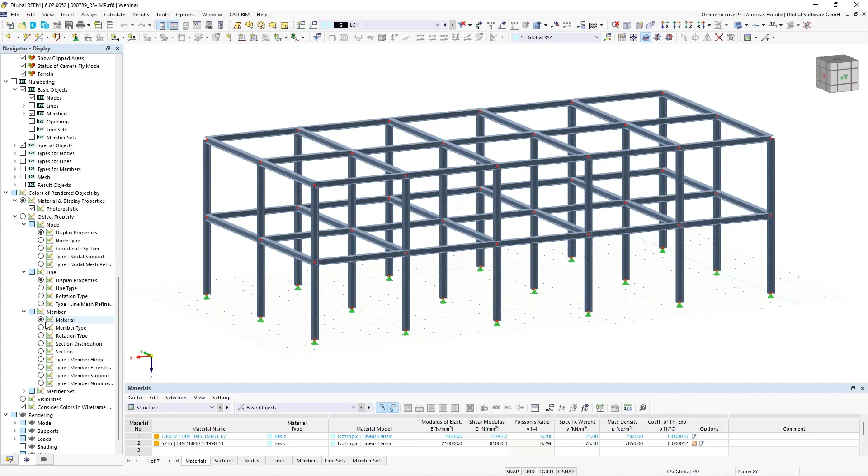I can show you the navigator display. You can use different settings here. For example, the members according to member type, section, and you can see there's the same color for all the same cross sections. I would like to show you two possibilities to show the columns and longitudinal beams and so on with different colors. At first, I start here left above with the base data.

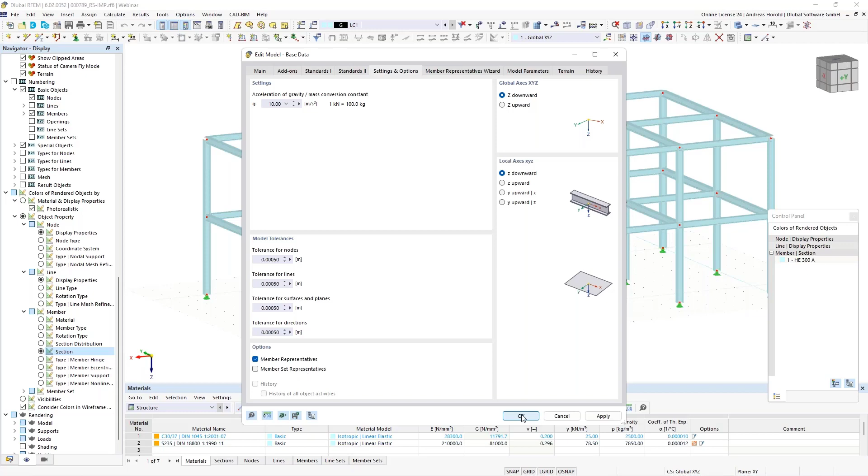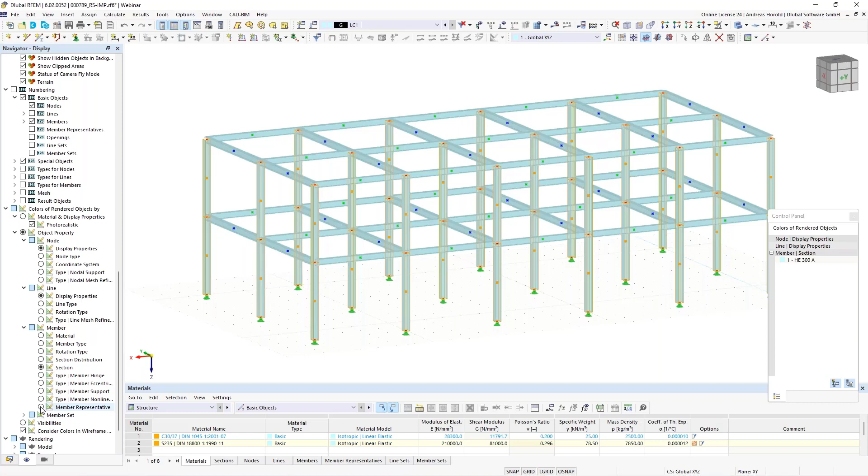And I go to settings and options and activate the member representatives. Okay. Now you can see the different member representatives. For instance, the cross beams and the longitudinal beams and the columns. And you can select them here in the navigator display on the left side, member representatives. And now there are the columns and so on with different colors. And it's also possible to rename them.

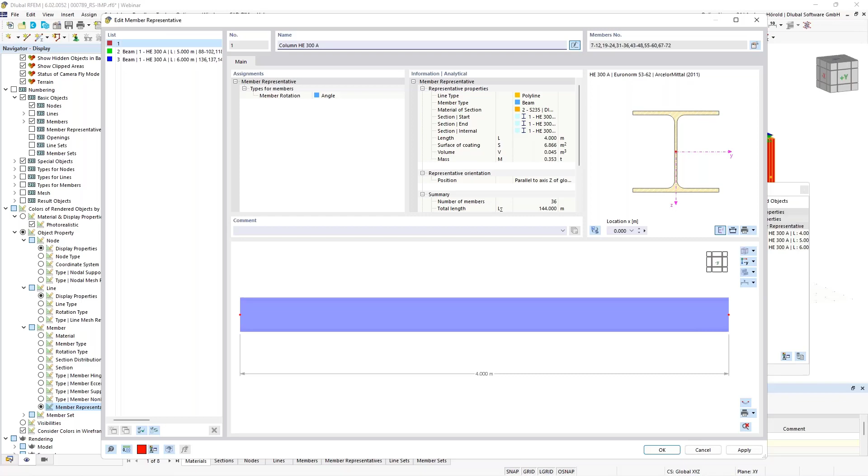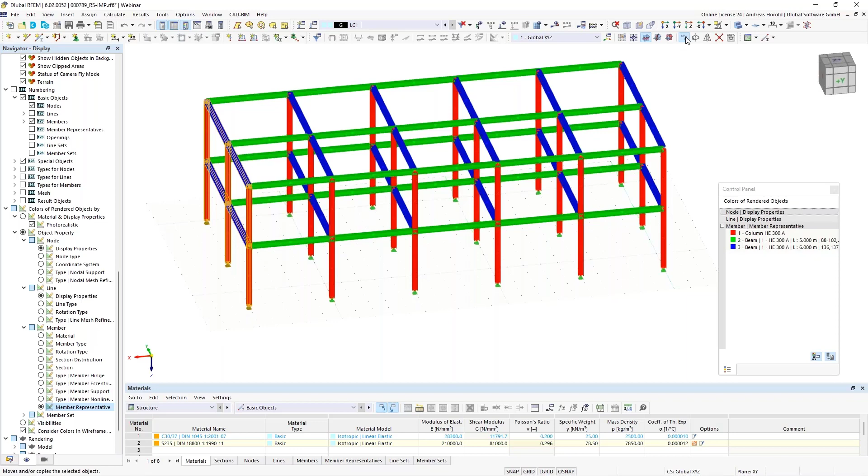If I click on such a member representative, I can edit here the name. For example, call it column HE300A. Okay, and I could do that for all. So that's one possibility, but the disadvantage is, it works now because all the members have different lengths. But for example, when I select those here and move them 1 meter in X direction, then you can see those members and those members have the same length. And that's why that option doesn't work anymore.

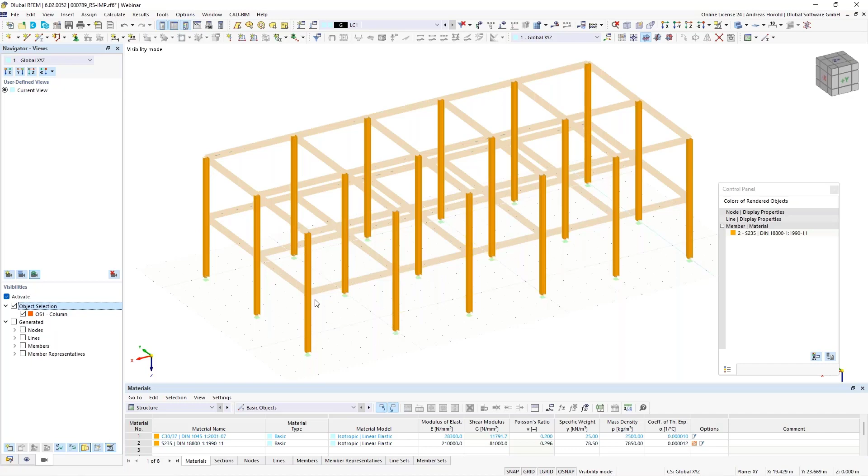Okay. I switch off the member representatives. I can also deselect it here, member representative, then the dots are also undisplayed. Okay, so next possibility, I create object selections. With a right click here in the navigator data, I select new object selection. First, I select the members that are parallel to a certain member. I select one member, okay. And I call it column. And how can I display it? So for example, that's the first selection. And you can see it also in the navigator views.

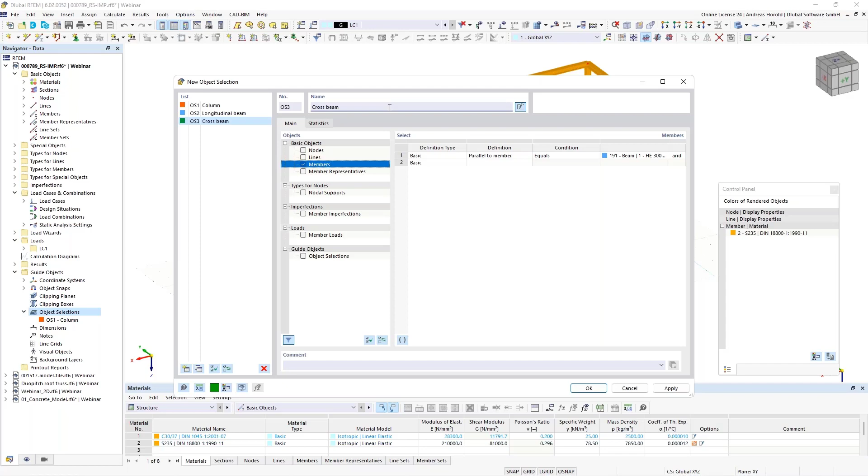So we continue with the next object selection. I have to activate all again. So new object selection, the same workflow, members that are parallel to this member, for example, and I call it longitudinal beam. Okay, next selection. Again, members that are parallel to this member. And I call it cross beam. Okay.

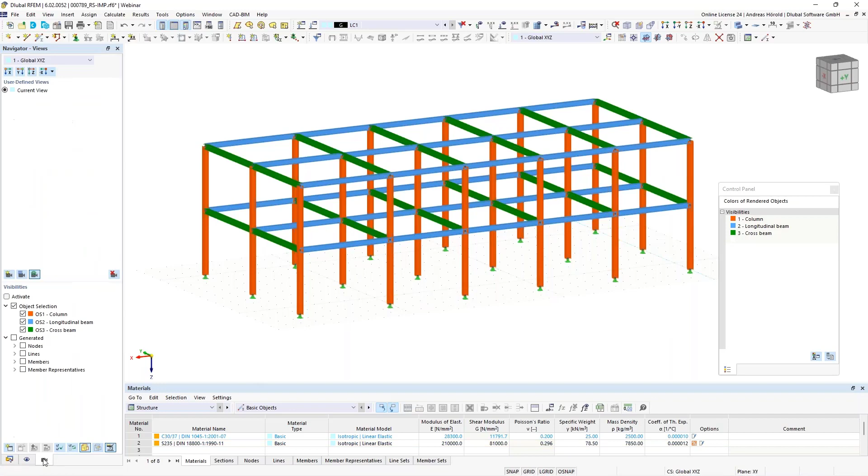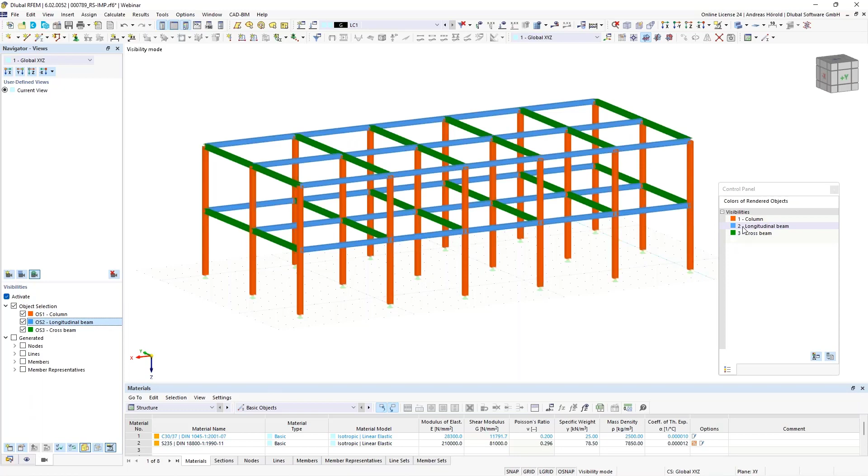And now you can switch to the navigator display. Scroll down and check here visibilities. And now there are all the members with the different colors. And the next advantage is you have got certain views. You can activate, for example, columns, longitudinal beams, cross beams, and so on. And you can also change the color if you want. For example, yellow. I think it's a nice solution. You have got the views in the navigator views and the colors in the rendering according to the visibilities. Okay, that's all to this question.

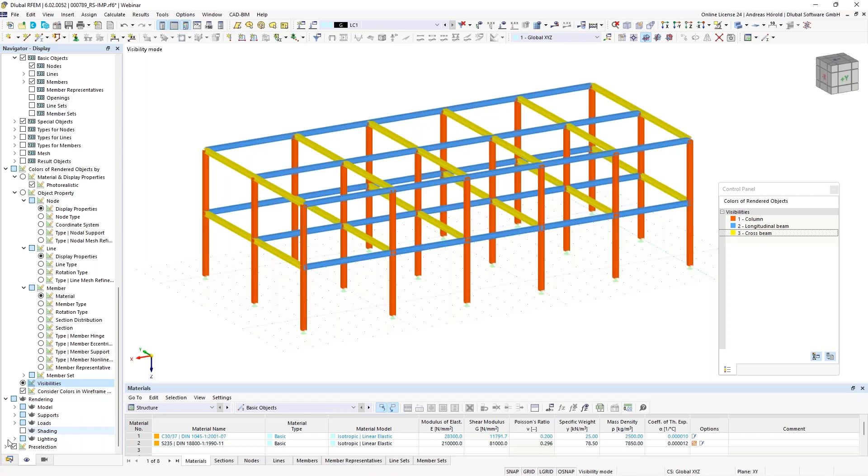We turn to the next model. Such a small steel hall, because the question is, where can I activate the lack of correlation in the load wizard of RSTAB 9 and RFEM 6? Now you can see this building with small height and so on. If the wind load for buildings or structures is to be determined by the simultaneous assumption of aerodynamic pressure and suction coefficients on the windward and leeward sides of the building, the correlation of the wind pressure on zones D and E of the wall surfaces may be taken into account.

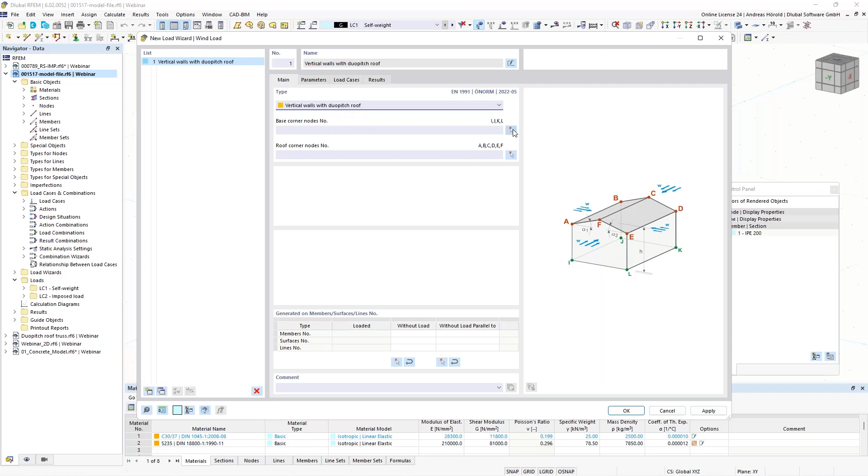I would like to show that on an example. I create a wind load. Here left above, insert, load wizards, wind load wizard. So now I open the dialog box. At first I select vertical walls with duopitch roof, and I have to select the base corner nodes. That's quite easy for that model. Okay. And the roof corner nodes.

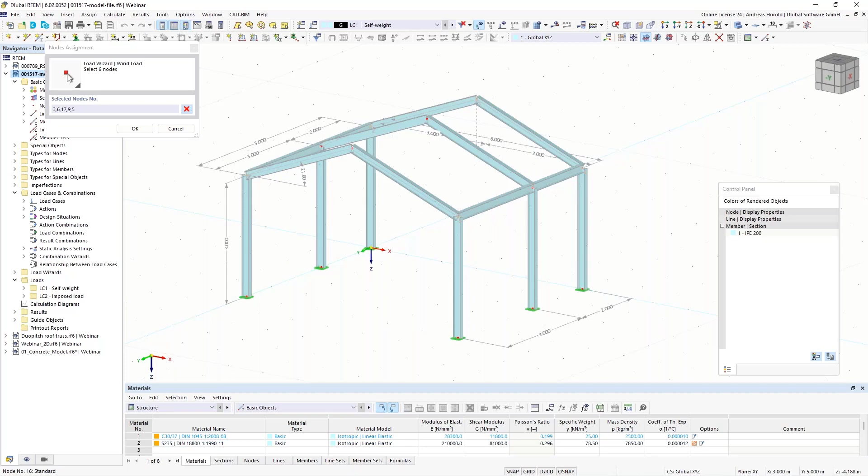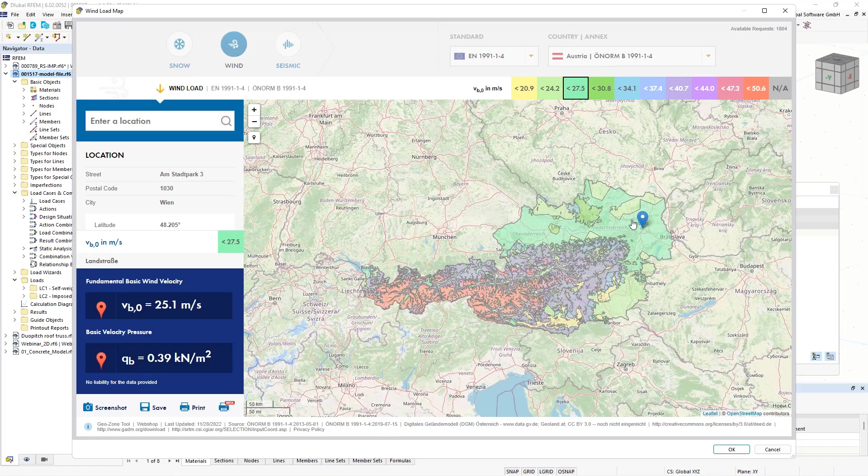Okay. So that's all. And then we turn to the parameters. I use the load maps and I import the location. I selected the Eurocode and the national annex of Austria. Yeah, Vienna is selected. I leave that for that example.

What is important to us is here at the bottom, the lack of correlation according to Eurocode. For buildings with an aspect ratio of height to width larger than 5, the resulting force is multiplied by 1. And for buildings with a ratio of height to width smaller than 1, the resulting force may be multiplied by 0.85. And intermediate values are linearly interpolated.

So I create a load case at first, and then let's turn to the results. And we take a look at the zone D and E. We remember the wind pressure and suction, 0.56 and 0.20. And if I go back to the parameters and I select the lack of correlation, then the loads should be decreased. Yeah, you can see it was 0.56 and it's now smaller, and also the minus wind pressure on zone E.

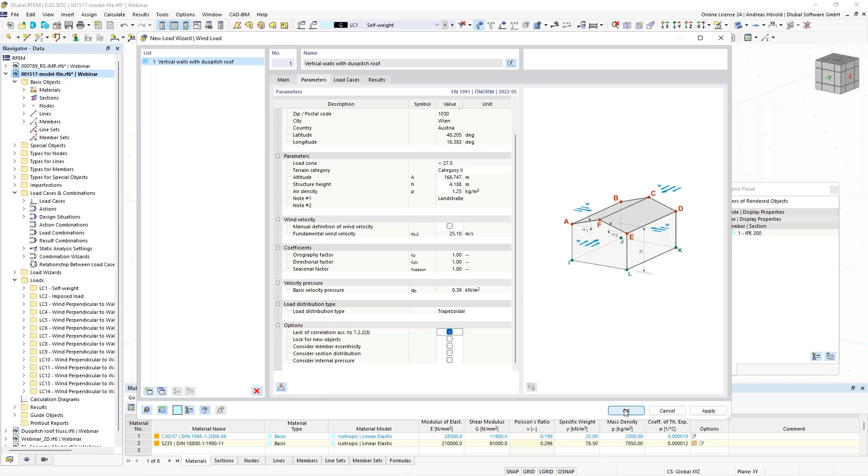Okay, then we turn to the next question. RFEM 6 crashes directly after the program start. What can be the reason? Recently, the graphics card was mostly to blame for crashes occurring after the program start or extremely slow program reaction. Yeah. I would like to show the website.

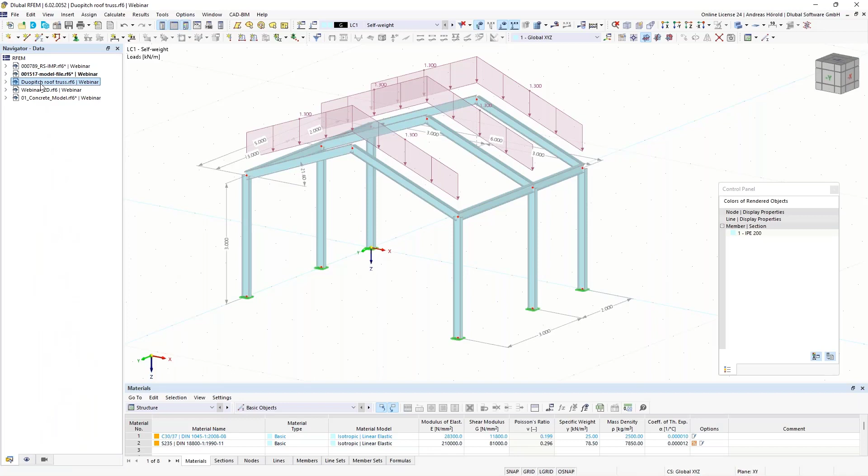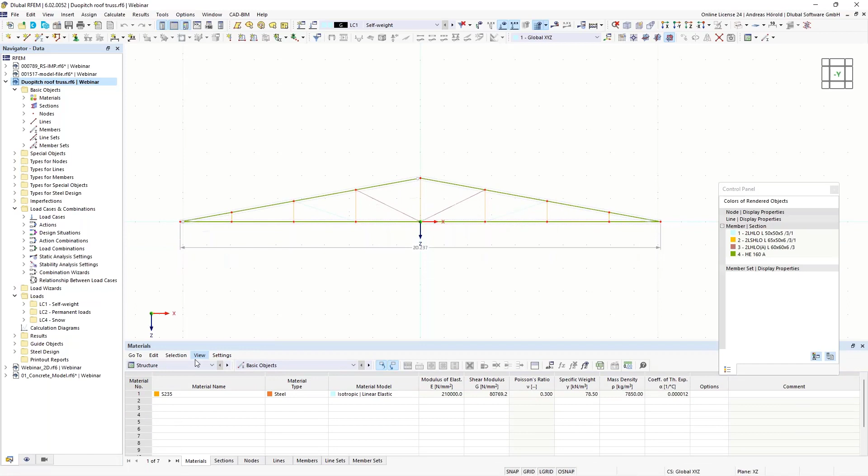We turn back to RFEM and to the next model. So the next question is, it is not possible to design double angles for my model using the steel design add-on. Every time I try it, the program shows information about the invalid section shape. Okay, let's do the steel design. Okay, so you can see the error message.

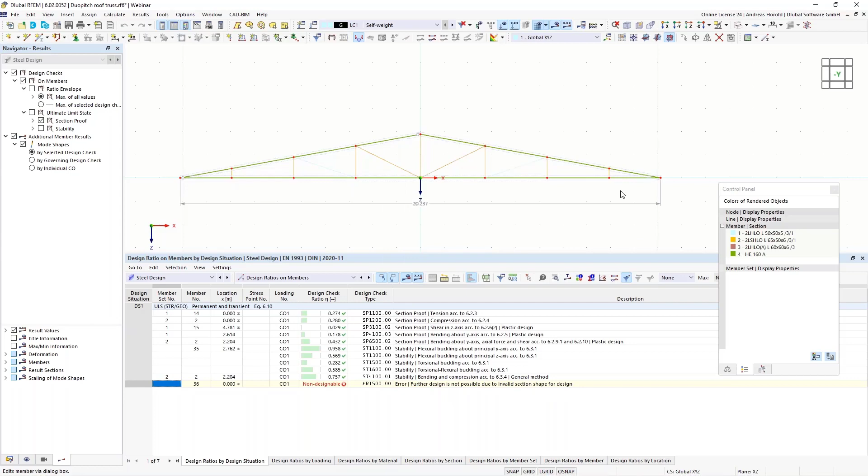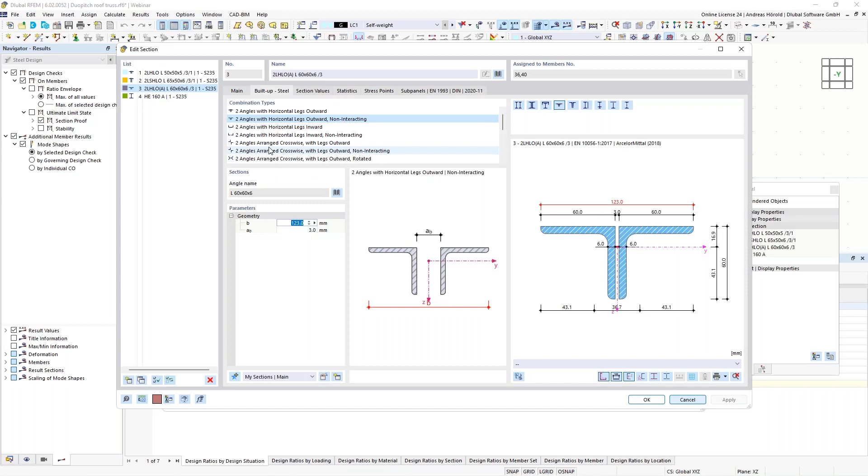So you can see that member is not designable because of the invalid section shape for the design. So I can select the two members, and then members, edit, and I can edit the section. It's a built-up steel section, and the design is not possible for the non-interacting combination type, that one. But cross-sections without this property can be designed by the add-on, for example, this one.

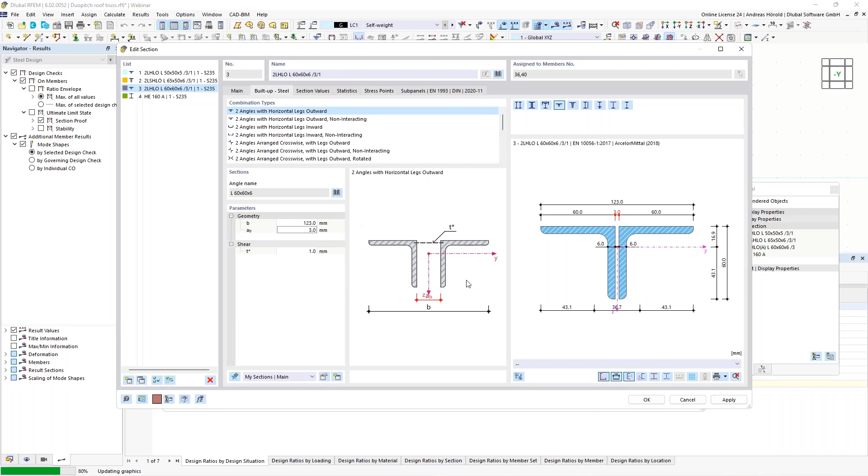And now you can see the shear. The interaction of members can be affected in RFEM by the T value. It's taken into account when calculating the shear areas and depends on the formation of the bracings. I leave one here. I select new section, L 60 by 60 by 6. Okay, 123. Okay, that's all. That should be sufficient. I start the steel design again. And now it should work.

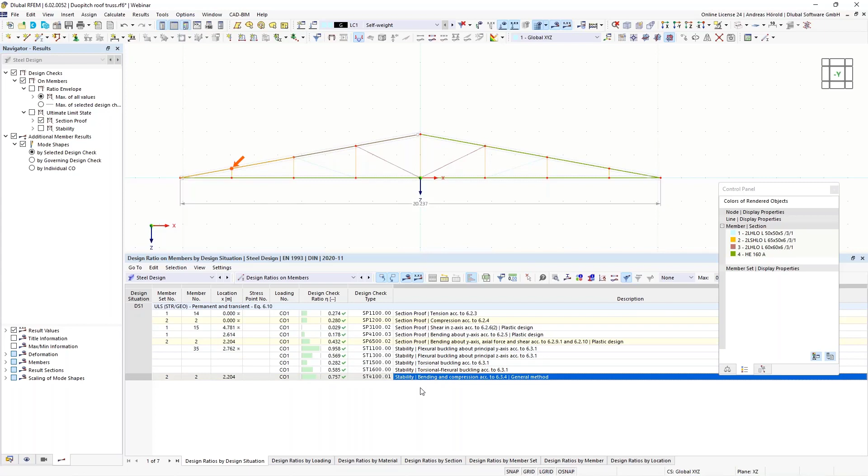Okay, now we can see the stability design. We don't get any error message, and that's why it works now, because of our changing of the cross section.

Okay, then we turn to the next model and the next question. Next question: is it possible to display the sum of forces on a line hinge for the dimensioning of fasteners later?

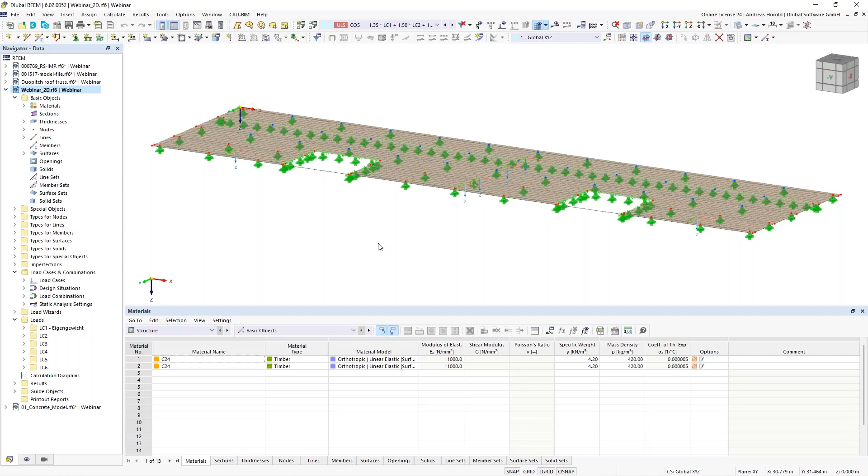Yes, that's possible. With regard to the dimensioning and choice of fasteners to be applied between the two surfaces, it's useful to know the resulting forces or moments between these surfaces. We have got a line hinge here, we can double click on it.

There's a very small spring around the x-axis, and a higher spring constant for the translation in x and y direction.

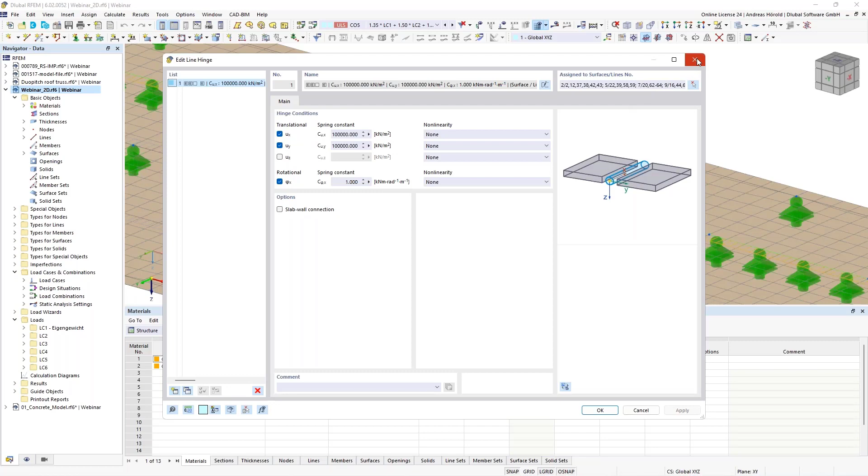So, if you want to see the results, we can do a right click and then turn to the result diagram. Then you have to scroll down, it's quite at the bottom. And then you see the releases here, line hinges, and the forces.

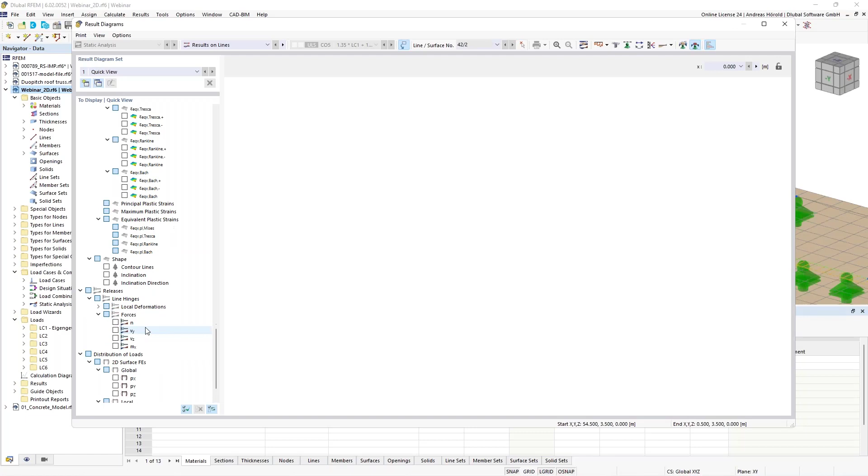What's interesting to us is vz, and then right above, with that button, you can edit smooth ranges of the result diagrams. Just click on it and you can enter certain areas, for example from 0 to 5, 5 to 10, and 10 to 15.

And if you take a look on the right side, for results, it's automatically selected that we want to display or smooth the releases and forces vz.

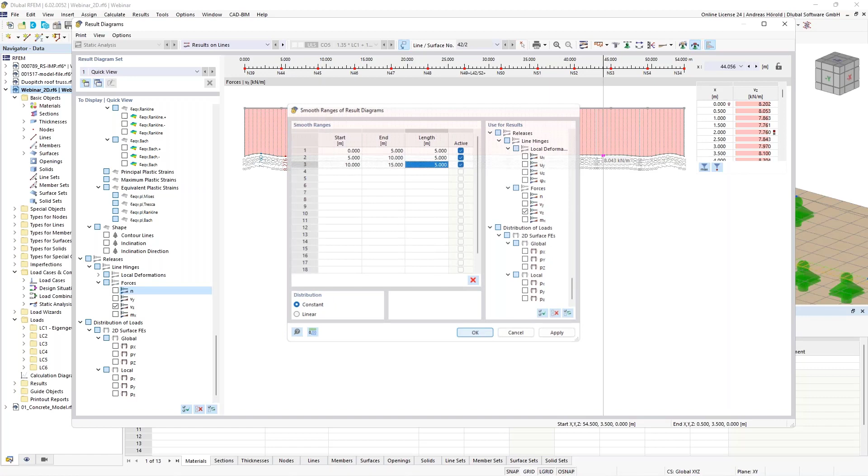Now you can see the sum of that area here, the 5 meters, about 40 kilonewton. That's quite similar for our fields or areas. And the average is about 8.1 kilonewton per meter, which would be the value for the dimensioning of your fastener.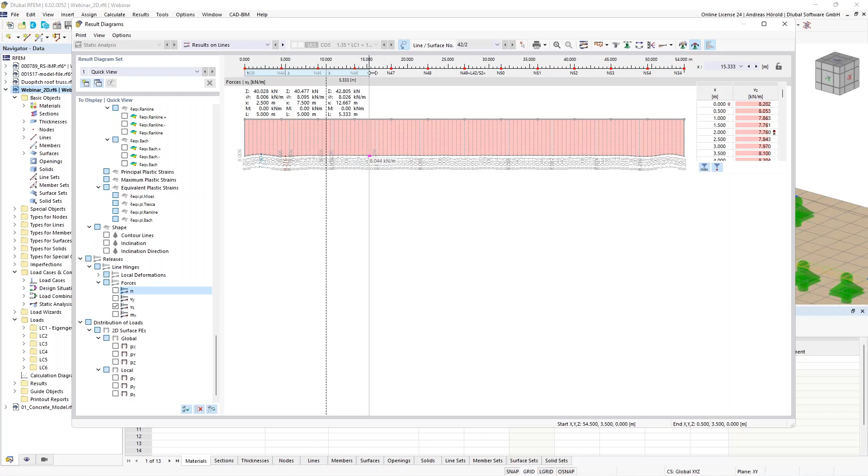You can also modify the area, extend it for example, and you can see the average is nearly the same over the length of the line hinge.

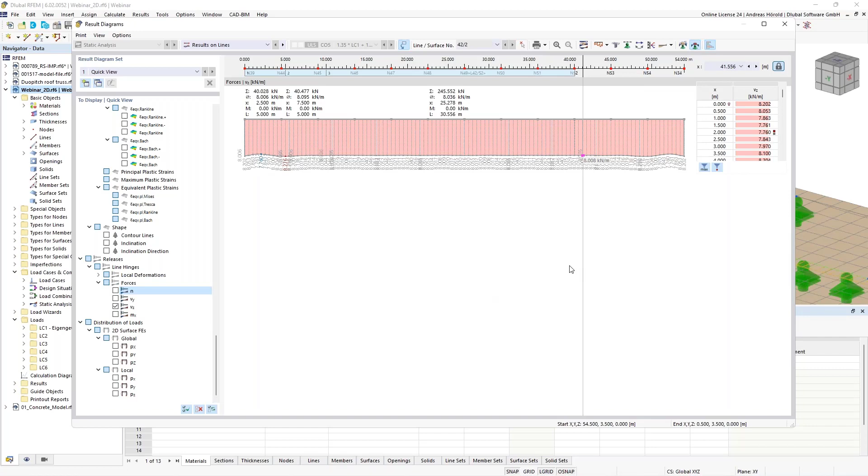It's also possible to print that directly to the printer, to the printout report, to a PDF, to the clipboard, or to a file, which would be a PNG or JPG file. That would be possible. Okay, that should be all to that question.

Then we turn to the last model and the last question. It's about concrete design. The question is: when modeling and calculating downstand beams made of reinforced concrete in RFEM 6, is it recommended to always create member sets?

I have to say yes, at least if there are 2 or more members that act as a continuous member, then I would say modeling with member sets is recommended. We did it in that example because this is the only way to consistently determine the reinforcement for the entire structure components. It's an advantage, especially for the calculation of the anchoring lengths.

Now we've got ribs here, and for ribs, the effective width is not determined along the complete member set. In that example, one member was defined for each span. For example, we can double click on it.

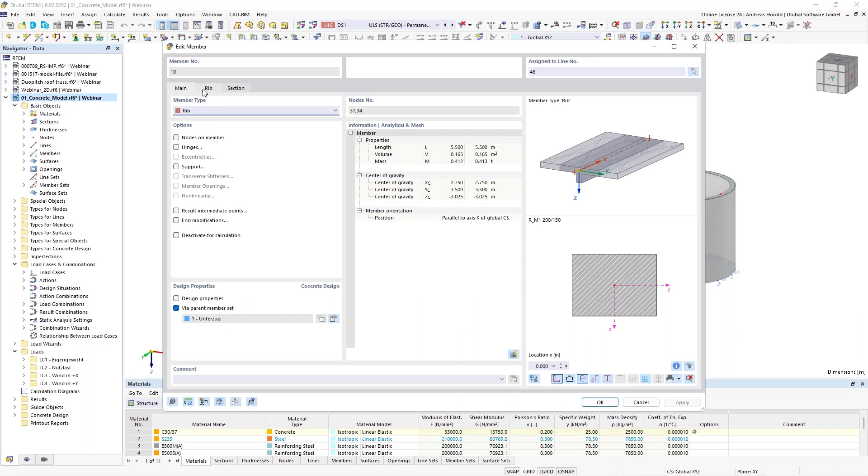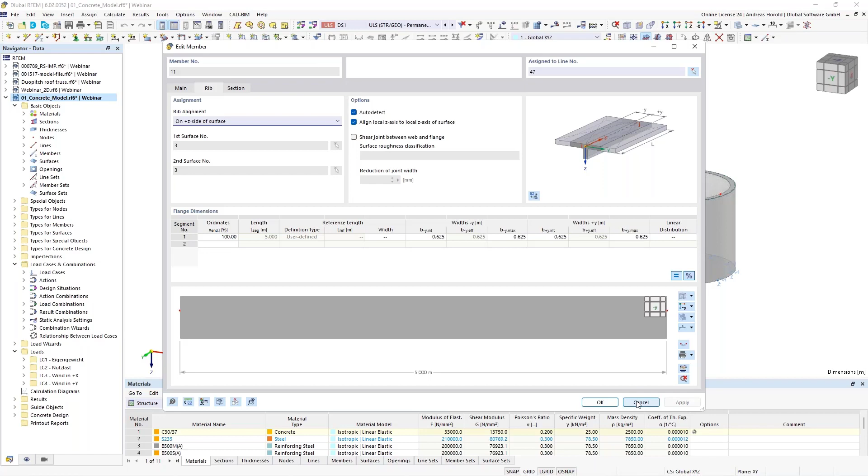You can see the rib, and the flange dimension is 69 centimeters for that beam, and for that beam or rib it is 62 or 62.5 centimeters, because of the different span of the beam.

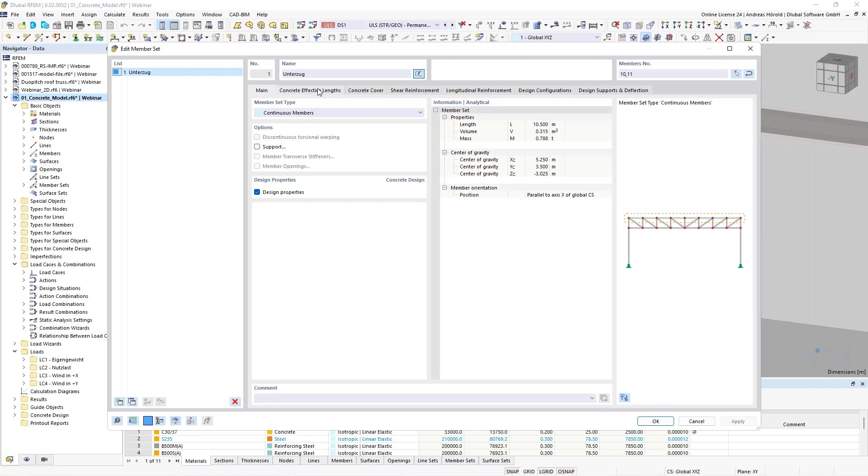And if I click on the member set here on the pointed line, then you can open that dialog. You can select the concrete effective length, concrete cover, and the concrete durability, which for that example is XC1.

As a nice graphic, it's dry or permanently wet in our example. Then the shear reinforcement: it's possible to define several reinforcement areas without effort on the member sets. This way the shear reinforcement can be quickly defined.

For example, above the center walls, in the middle, by smaller spacings or different rebar diameter. You can see the spacing is 10 centimeters and the diameter is 14 in that area, and here we have a larger span or distance between the stirrups.

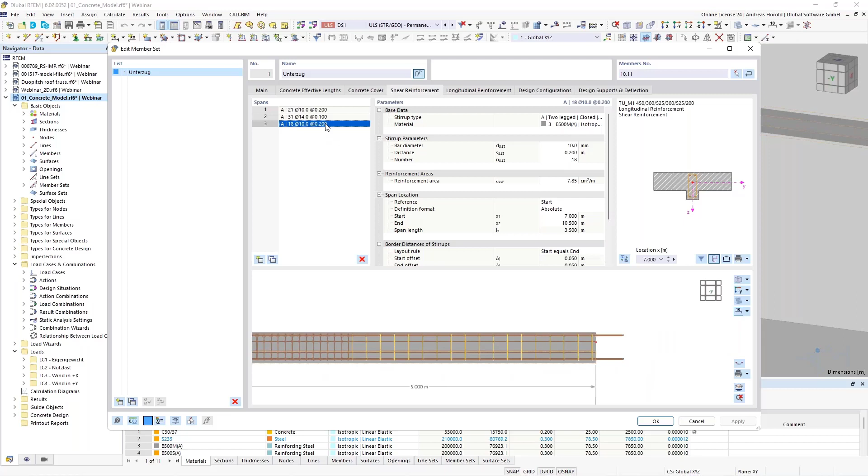So then the longitudinal reinforcement is continuous, also over the supporting here. Then you can see the anchoring lengths and so on.

Okay, and it would be also possible to design supports for the deflection analysis.

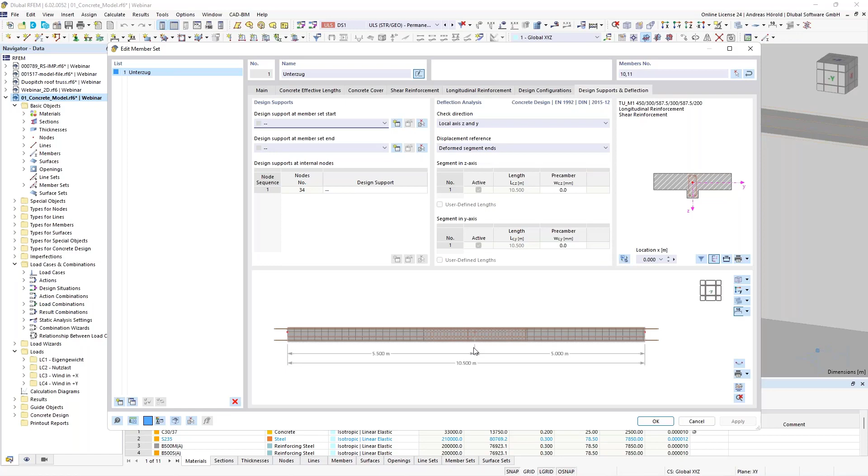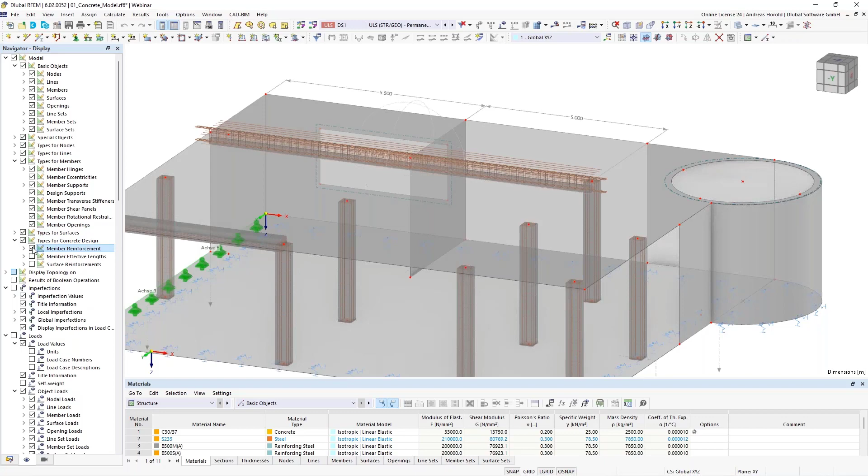And if I applied it, I can also let the program display the reinforcement. In the navigator display, you can search for the type for concrete design, the member reinforcement, and the surface reinforcement.

And that's the reinforcement of the member set that we recommend to define.